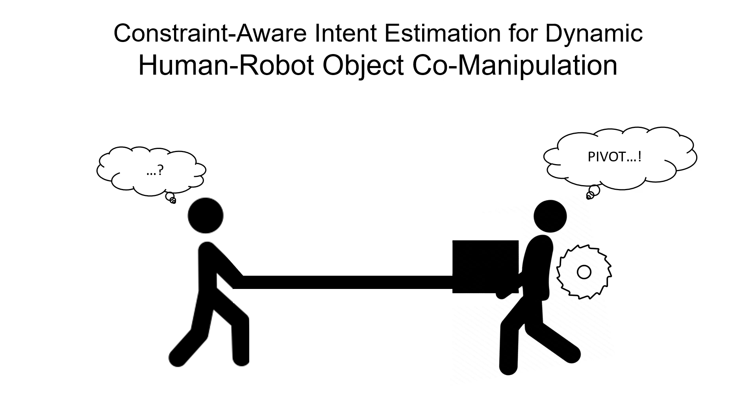In object co-manipulation, even in the absence of verbal cues, we can infer the intent of the other person. In case of sudden changes in direction, we immediately follow their lead while reflecting constraints and capabilities of both of us. These challenges are not always addressed, even in human-human interaction. Robots, being significantly stronger, can be better assistants if we tackle these challenges.

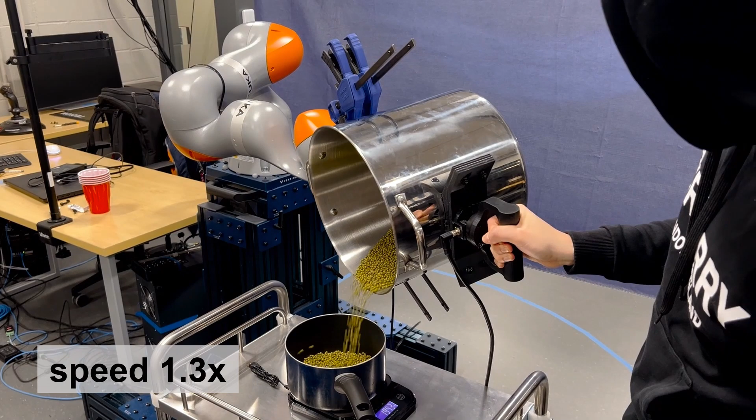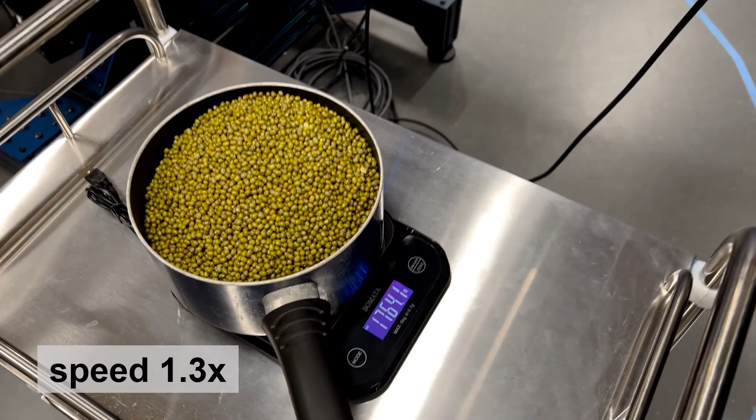In this work, we focus on human-robot collaboration tasks, with robot being capable of assisting in rotational commands. For instance, when the human requires rolling a heavy pot, robot should reduce the torque on human wrist. In such scenarios, robot needs to be also robust with respect to variable weight of the object.

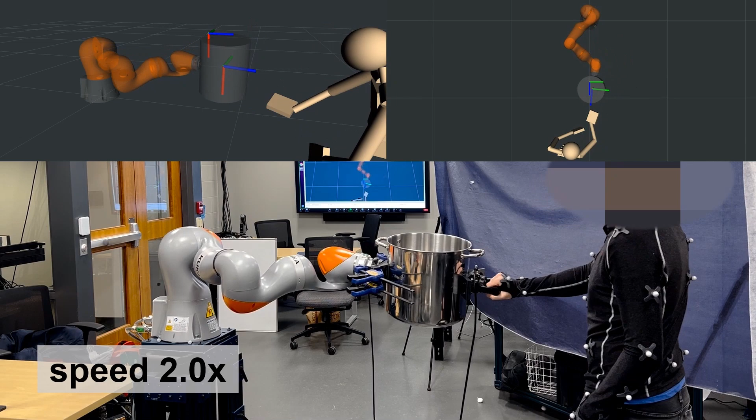We emphasize the importance of object transport to a goal in full 6D pose and propose a novel intent estimation method while considering constraints for both agent's capability and task feasibility. It is also important to smoothly switch the robot role between a leader and a follower. As leader, robot reduces the effort of the human, being more capable than a human partner. And as the follower, robot will follow the human lead in instances of disagreement. Our method shows 30% better performance than the state-of-the-art.

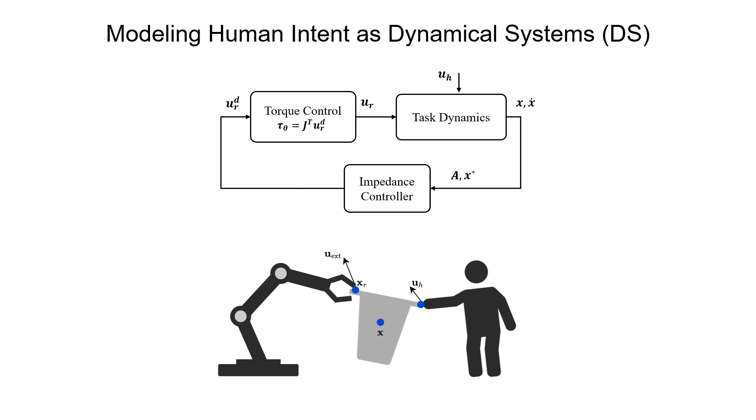Human intent estimation is a formidable challenge. Here we seek a representation of intent that is approximately accurate and proves valuable for dynamic control. We begin by modeling the human intent as an autonomous dynamical system directed towards a specific goal pose. DS-based controllers are robust to disturbances, and combined with an impedance controller, can be used to achieve force-level compliance. Additionally, task dynamics depends purely on motion history, without relying on force-torque sensors.

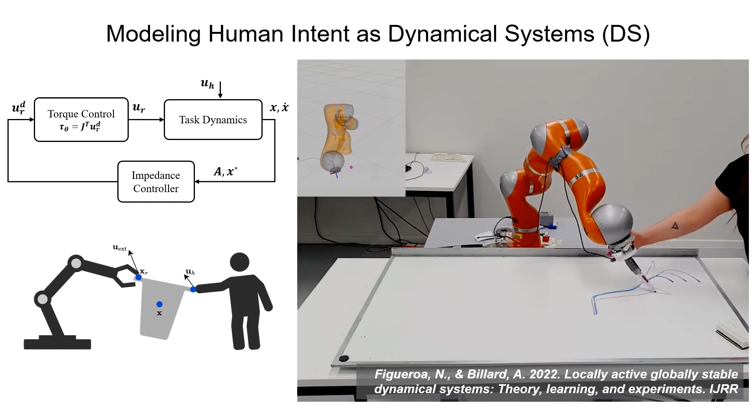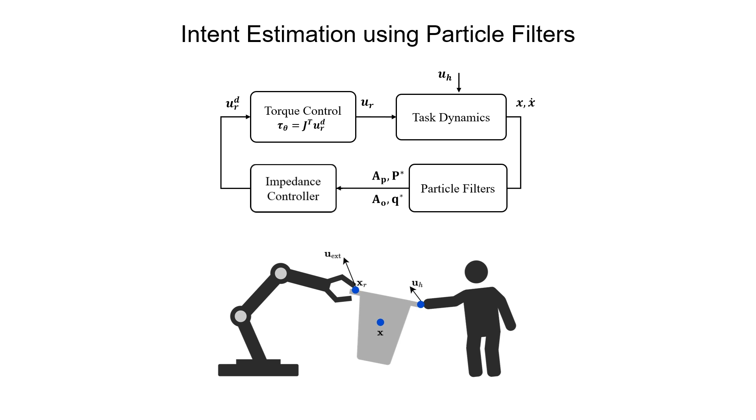However, using only DS to model the intent is not sufficient, since it only follows the specific dynamics of motion and towards a predefined goal. In a realistic human-robot collaboration, the dynamics of motion and goal, which are the DS parameters, are unknown. Using particle filters, we use past velocities as observations and use Bayesian update to estimate the probability distribution of the DS parameters. Since we need to consider explicit constraints, we use two filters, one for Cartesian coordinates and the other rotational coordinates.

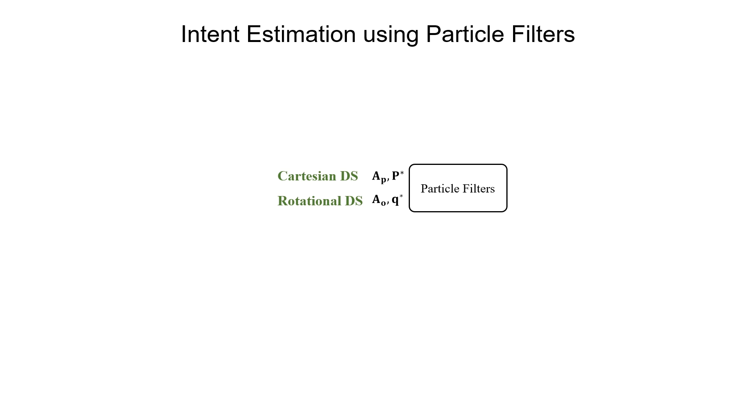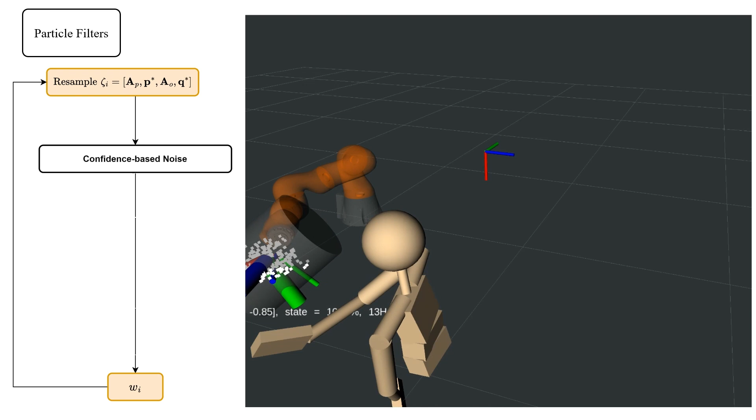The particle filter uses a zero dynamics model with noise and an observation model to estimate probability distribution of the goal state. The noise represents the uncertainty of the estimation. Intuitively, when the confidence of the estimate is high, a low noise is preferred, so the estimated goal and dynamics stays steady. And when confidence is low, a high noise is preferred for fast changes in the estimation. Based on the estimated states and dynamic matrices, the velocities and accelerations are evaluated. Particles are then scored based on the error with respect to the velocities and accelerations of observation models.

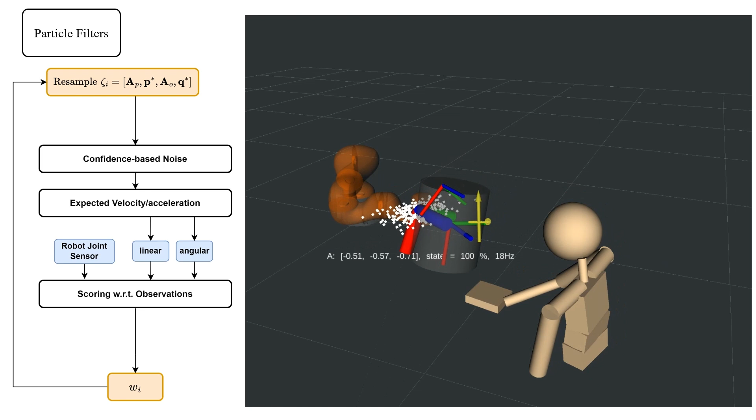We tailor the particle filtering strategy by trimming the remaining particles to also take into account the capability and constraints of both the robot and human. Because human can freely move in workspace, they inherently adjust their posture and movements based on environmental constraints. Thus, human manipulability can be adopted as an indicator of directional preference, capability, and comfort. We capture human posture during collaboration and reshape the noise of the Cartesian DS based on the hand manipulability ellipsoid axes.

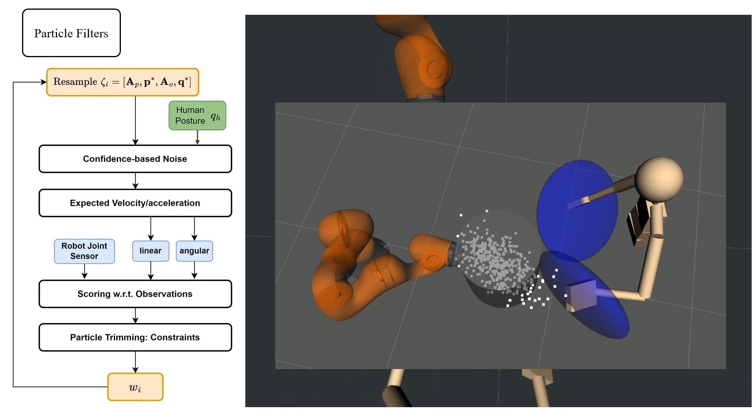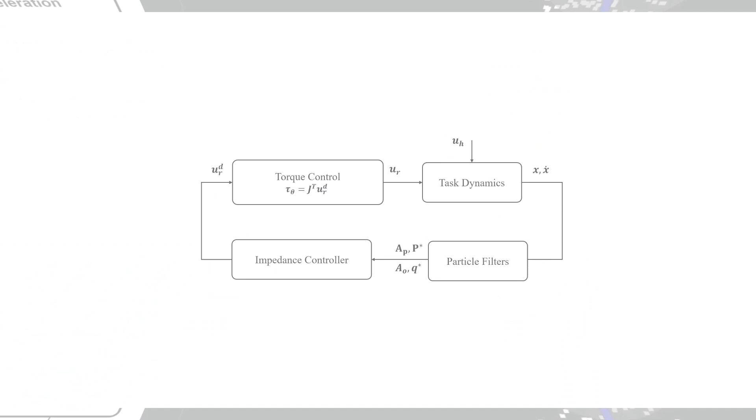To address robot capability, we implement a particle trimming scheme to remove goals that are infeasible for the robot based on inverse kinematics. For computational efficiency, we use cuRobo, a GPU-accelerated inverse kinematic solver. Along with the goal pose feasibility, we also want the robot motion to be feasible. To address this, we use a joint limits-aware controller to realize the desired control input. To respect the joint constraints, a repulsive potential will be generated to resist the violations. In addition, for intuitive interaction and perceived safety, robot should be kept in a joint configuration familiar for the human. This can be achieved with a secondary task projected into the null space.

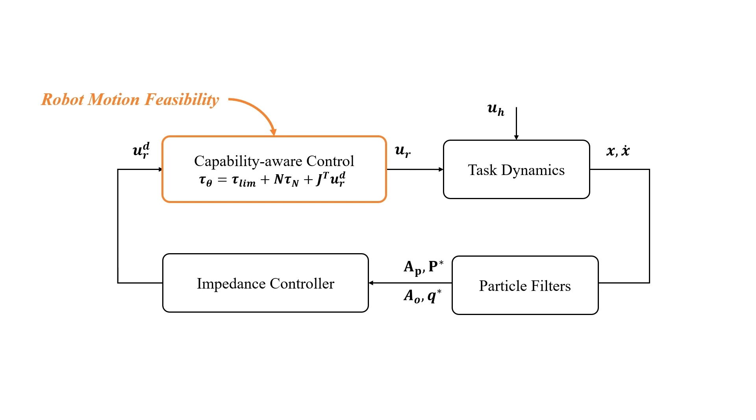Furthermore, the robot needs to adapt its roles by proactively minimizing human effort as the leader, while in instances of disagreement with humans smoothly transitioning into a follower role and relinquishing control to the human. We achieve this by adapting both the noise of the filter and the impedance control gains online.

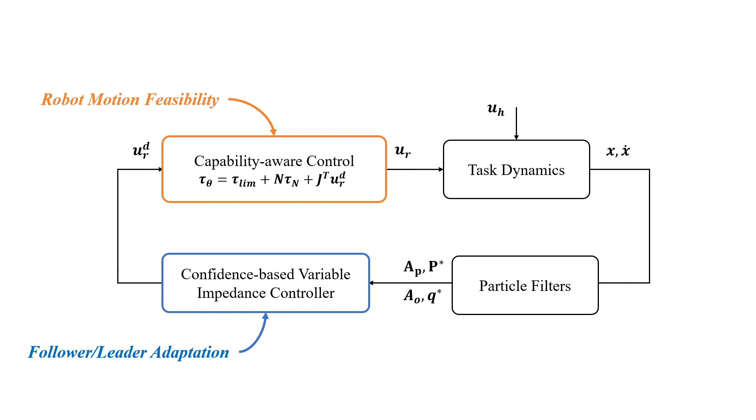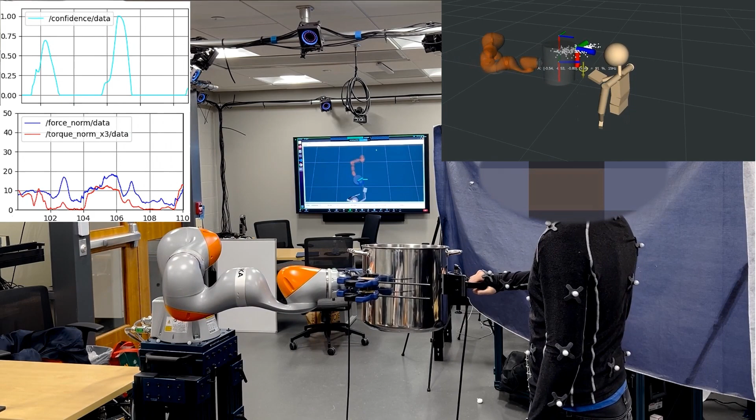Integrating the suggested steps, we devised a game wherein the human is tasked with moving a weighty object toward a designated goal pose, specified by longitudinal, lateral, and roll angles. Upon reaching the goal pose, the task ends, and the team reverts to the center of the workspace for the next goal pose to emerge. Throughout this process, the robot remains unaware of the ground truth.

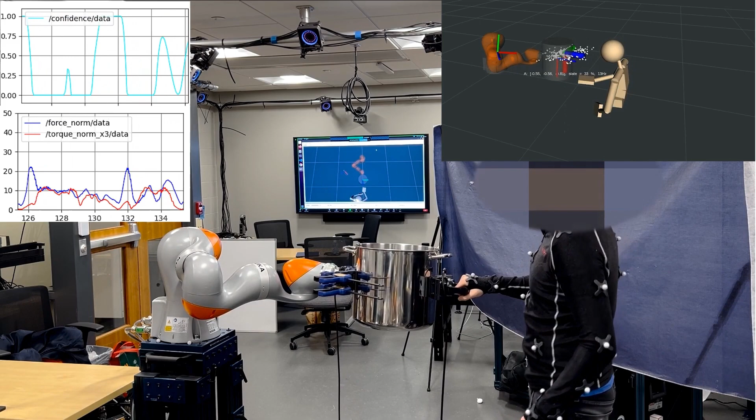The graphs show the confidence level and the force torque applied by the human. As it can be seen in the graphs, when human and robot motion is in agreement, the confidence level is high, and the robot leads with a high impedance gain, generating the majority of the forces for motion and deceleration. On the other hand, in cases of sudden changes in human force that result in unexpected deceleration, the impedance gains drop as a result of motion uncertainty, lowering the confidence level. In this case, the robot acts as a follower.

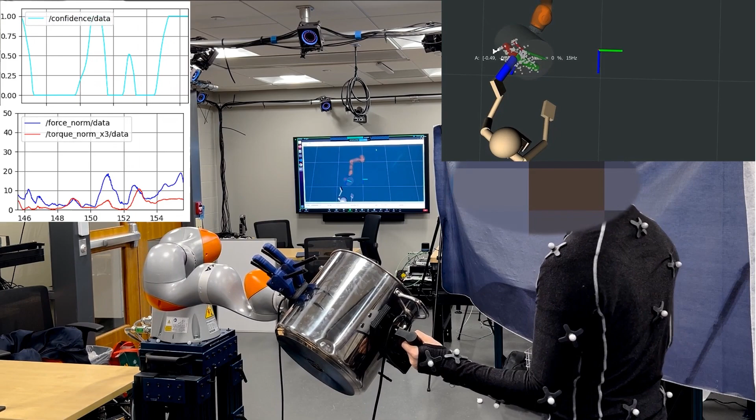The simulation on the top right shows the influence in particles distribution. At instances of disagreement, particles move ahead of the robot, leading the robot to follow the estimated goal. Our proposed approach represents a significant step forward in physical human-robot interaction, promising to extend the application of robots in various sectors by ensuring their cooperative interactions with humans are both safe and effective.